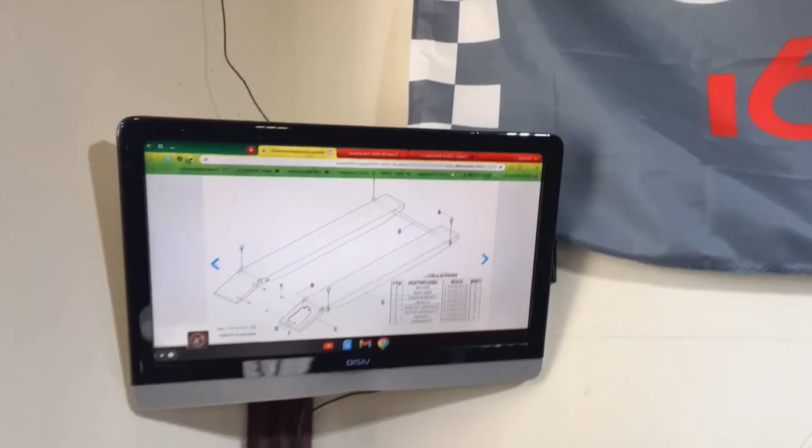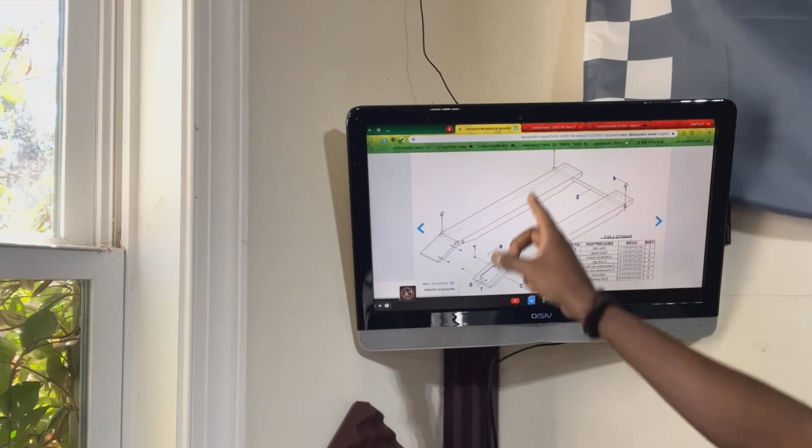All right, the long tube goes first in the front end of the lift, okay, with these little lock pins, on the outside of each side. The shorter ones go on the back end, okay, with the lock pin being on the outside of each end.

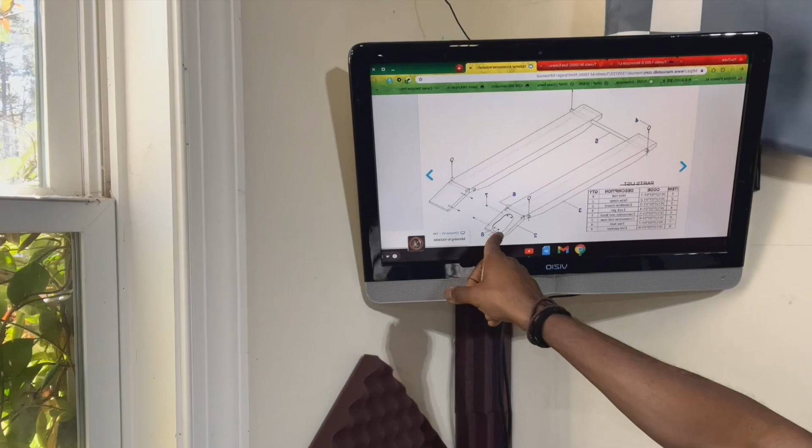Okay, I was wondering what the screws were for. The screws are for attaching the middle ramp to the outside ramps. They go from the inside, head in, and to the inside. Pretty simple once you have something to look at, but there's no instructions. I guess the idea is for you to get to the website and figure that out.

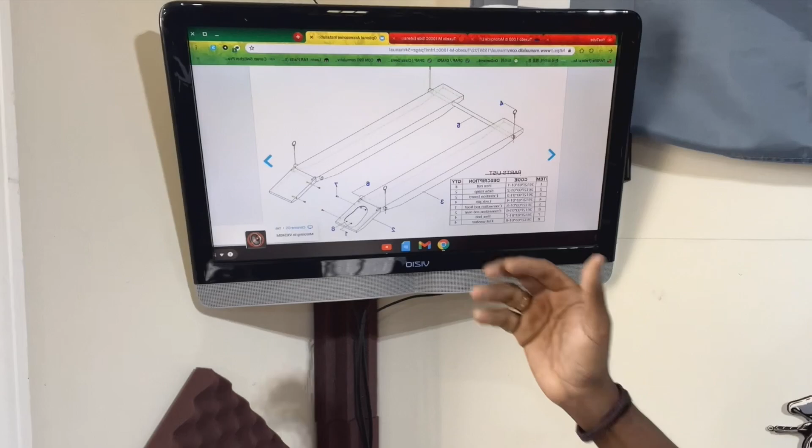So that's a parts listing that comes with it, and that's how it goes. It's that simple. Take a screenshot if you have one, or go to the website itself, manualslib.com, for the TUXEDO M1000C, and you're set.

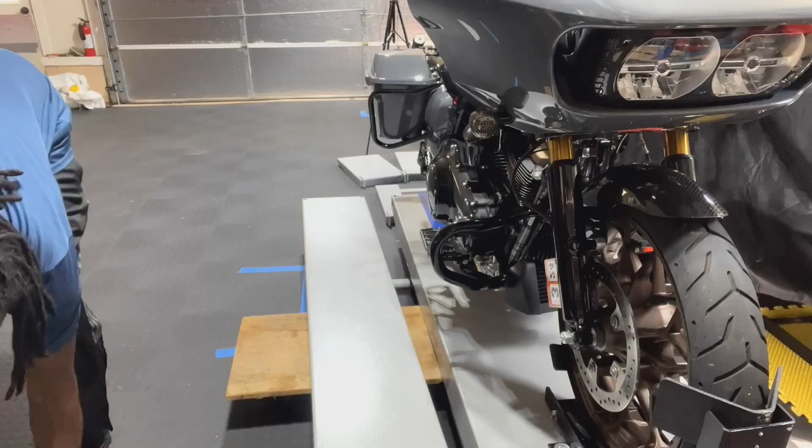And I'll show you a little bit of how I put it together. Excuse me, I'm sweating, out of breath. So give me a second and we'll put this thing back together. Press the camera for me, please.

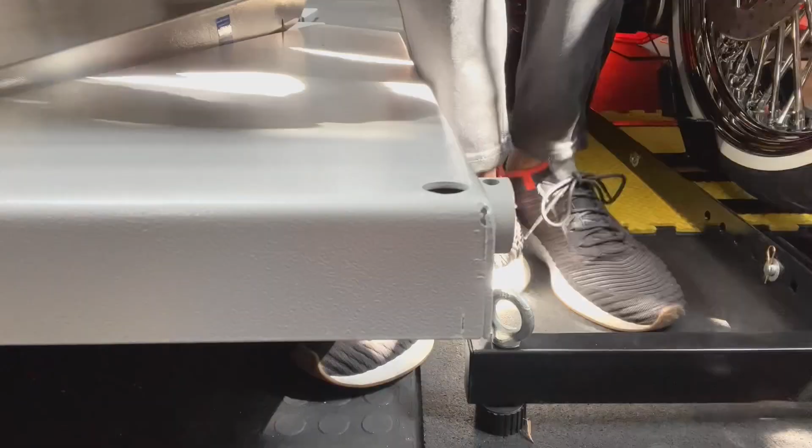Now that I have a place to put my foot, it shouldn't be an issue to push off the motorcycle. Certainly push off to get off this thing. So,

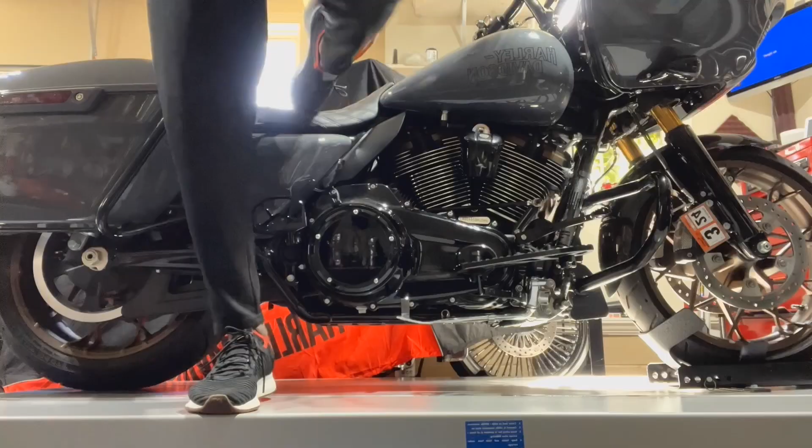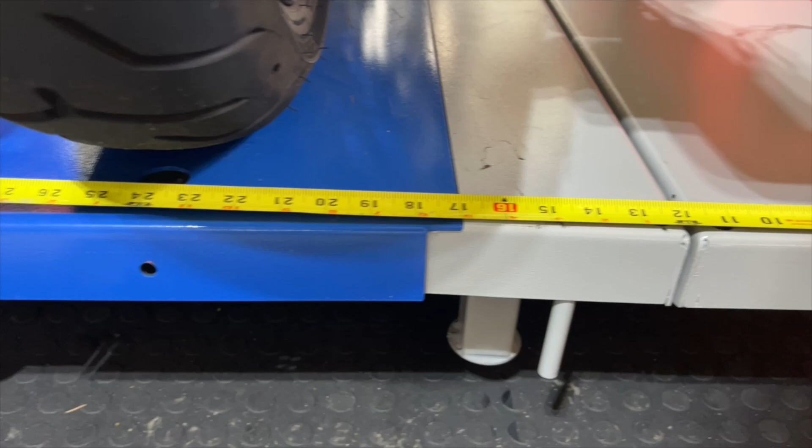I think money well spent. Safer. I don't have to worry about dropping my bike off. This is the current measurement. This was the old measurement. This is what it looks like with everything installed.

Very nice. Real estate is still minimal.